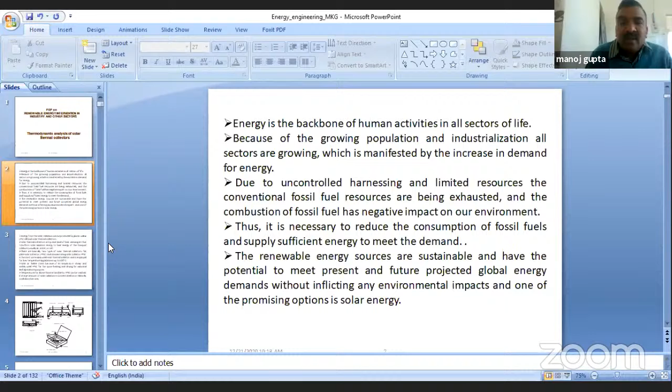And solar energy is one of such kind of renewable energy source. Energy is generated inside the sun due to continuous conversion of hydrogen into helium, that is nuclear fusion reaction. The temperature inside the sun is very large, but at the surface of the sun it is estimated to be about 5600 Kelvin. So sun radiates heat energy as per Stefan-Boltzmann law, and the radiation also reaches on the ground.

It is said if we can trap only 5% of this energy received from the sun on the ground, then we can meet the entire energy consumption demand of the world. So that's why solar energy is a very large source of energy. Definitely it is renewable, and it is very, very large.

Now, energy from the sun we can utilize by using solar cell or by using solar thermal collectors. Indirectly, we are using solar energy since long. That's why we treat the sun as God, because sun provides energy in various forms. For example, biomass, photosynthesis reaction is in the presence of sunlight. So energy from biomass is an indirect form of solar energy.

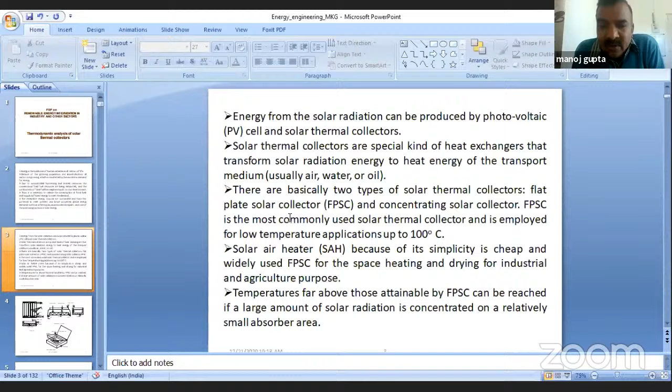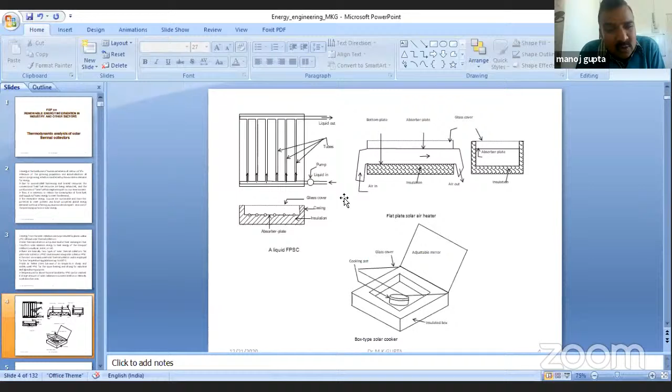I am talking about conventional because nowadays the solar water heater for domestic application is evacuated tube type. This is conventional, in which there is an absorber plate, and at the back of the absorber plate a number of tubes are welded, soldered, or clamped to the plate, and these tubes are connected to header tubes. So water flows through the tube, being heated, and is collected in the storage tank.

The next diagram is for solar air heater. Whenever there is a flow of air, from fluid mechanics, the flow of air is always through a duct in order to keep the pressure drop within limit.

As we know from the Darcy-Weisbach equation, 4fLV squared upon 2gD. In case of gas flow, for a given mass flow rate, the volumetric flow rate is high. So if a compressible fluid or gas is made to pass through a smaller cross-sectional area, the pressure drop will be more.

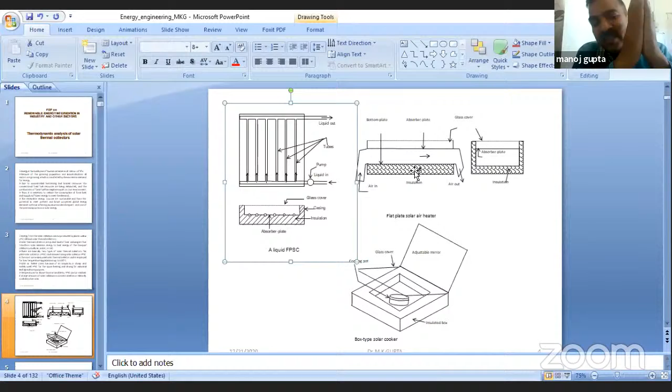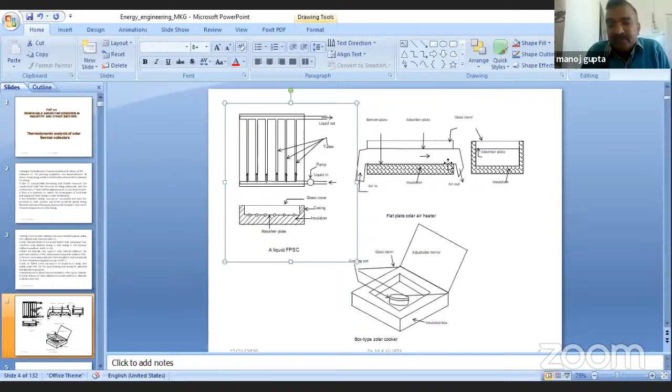So in order to keep the pressure drop within limit, the flow of air is always through a duct. Instead of a pipeline, we use a duct, and in case of solar air heater, the duct is formed by the absorber plate and a bottom plate, and the space between the absorber plate and bottom plate forms a duct. So air flows through this duct in the case of an air heater.

And now if we are using a concentrating collector, we can also use selective coating, and second, we can create a vacuum in the annular space between the glass tube and the absorber tube.

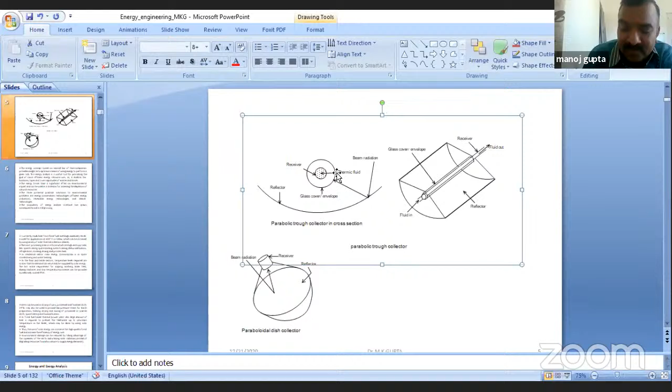In case of this flat plate collector, suppose this solar cooker, we cannot create vacuum between the flat glass and inside of the box or cooker, because glass is breakable. We cannot create vacuum in this.

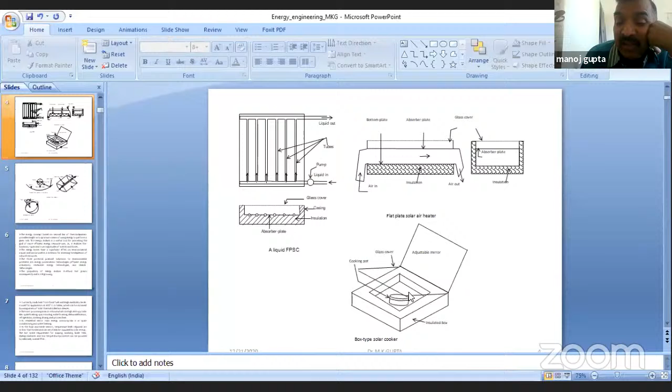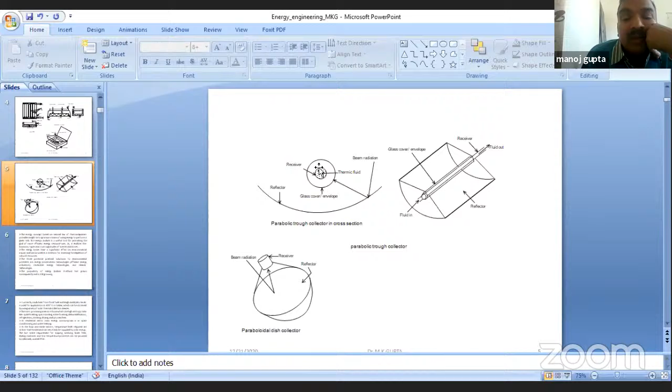But in case of concentrating collector, the vacuum can be created in the annular space between the absorber tube and surrounding glass tube. And definitely if we create the vacuum, then convection heat transfer is further reduced.

So by creating vacuum, we reduce the convective heat transfer from this absorber towards the glass tube. Because here the area of the absorber surface or receiver tube is small, we can go for selective coating.

In heat transfer, you might have studied Kirchhoff's law, which says absorptivity is equal to emissivity. Now this absorptivity may be on total basis or based on particular wavelength. So Kirchhoff's law says monochromatic emissivity is equal to monochromatic absorptivity, meaning emissivity for a wavelength equals absorptivity for that wavelength. Similarly, total emissivity is also equal to total absorptivity.

Now every body emits radiation of all wavelengths. As I told, solar radiations are of short wavelength in nature. So there are some coatings which have high absorptivity or emissivity for incoming solar radiation and low absorptivity or emissivity for outgoing radiation.

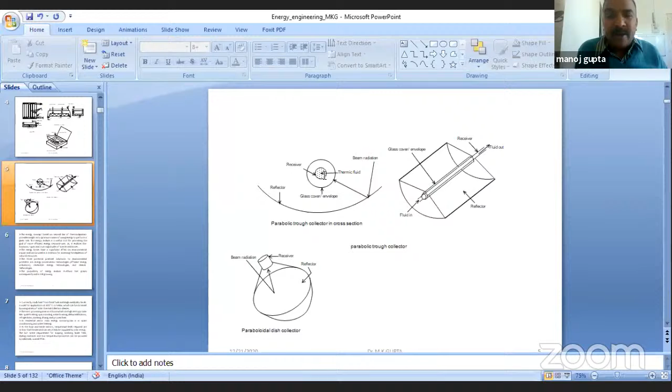Water is stored at high altitude. That potential energy of water, as we know from hydraulics, can be converted fully, if we ignore friction, into work or any other form of energy, because potential energy is high grade energy. But heat or thermal energy or internal energy are low grade energy, and complete conversion of low grade energy, especially heat energy, is not feasible.

Into high grade energy. For example, if we have heat Q from a source at temperature T, heat Q from a source at temperature T. Source means if we extract the heat Q from that source which is at temperature T, the temperature of source will not change. Now we can utilize this heat Q in a reversible heat engine cycle or Carnot cycle to develop work.

And work developed will be heat supplied into efficiency of heat engine. And efficiency of heat engine is 1 minus T rejection upon T heat addition. Means in this manner we can calculate the useful work that can be obtained from heat energy.

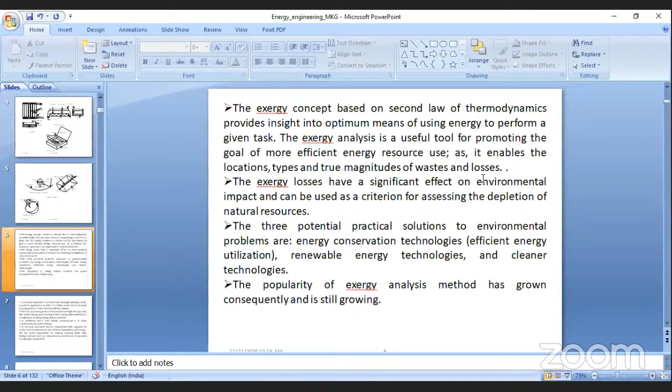So the exergy, or the second law of thermodynamics - actually first law deals about energy, while second law talks about the quality of energy. Or logically we can say heat energy at 30 degrees centigrade and heat energy at 200 degrees centigrade. Definitely heat energy available at 200 degrees centigrade is better than that available at 30 degrees centigrade, because heat energy available at near ambient temperature is of no use for us, but the exergetic value of heat energy available at higher temperature is more.

So from energy conservation point of view, we should include exergy analysis, or we should talk in terms of exergy besides the energy, because definitely we will have to use the energy balance first. So the exergy concept, based on second law of thermodynamics, provides insight into optimum means of using energy to perform a given task.

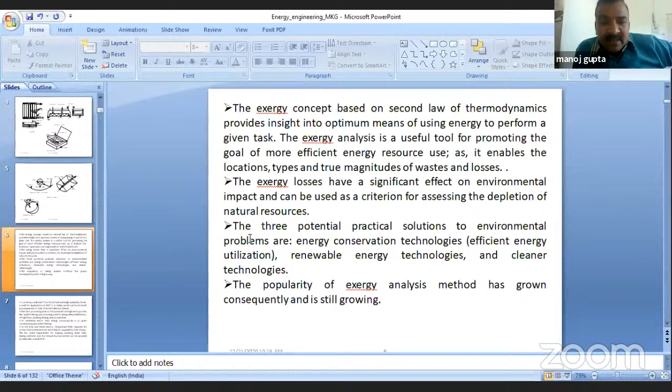Now come to why this FDP topic is relevant to exergy analysis. Currently, much heat from fossil fuels with high availability level is used for applications at 300 degrees centigrade or below.

For example, to heat water for bathing purpose, we normally use an electric geyser, meaning we are using high grade energy, electric energy, just to heat the water at 80 degrees centigrade. Currently much heat from high grade energy sources is used for applications at 300 degrees centigrade or below, which can be obtained by using a variety of solar thermal collection devices. For example, water heating - instead of electric geyser, we can use a solar water heater.

Actually, there is a degradation of energy by using electric geyser. I will come to those points later.

Now the most promising areas are those which are high entropy tasks, meaning where we can use renewable or solar energy instead of high grade energy for low temperature applications. The low temperature applications may be space heating, space cooling, water heating. Space cooling means using heat energy in vapor absorption refrigeration systems, either ammonia-water system or lithium bromide-water system, and water heating. All these are applications where heat energy is required at low temperature. I have not mentioned power generation. These low temperature heat requirements can be fulfilled by solar thermal energy, and if we promote the use of solar thermal energy in such applications, we can conserve our exergy rich fuel.

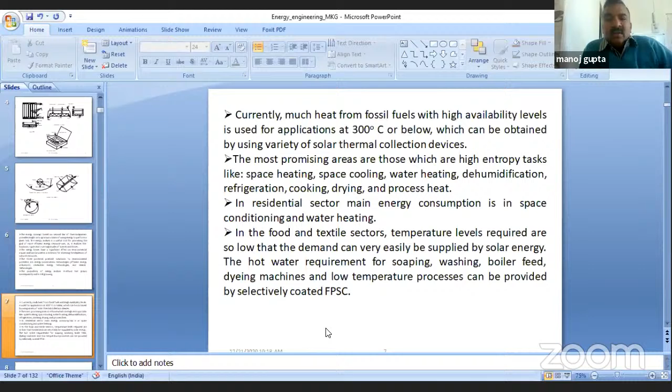Now, we were discussing that below 300 degrees centigrade, there are various applications where temperature is required, and that can be obtained using a variety of solar thermal collectors. Solar air heaters can be used for drying of yarn in textile and other industries. Parabolic trough collectors may be used to produce low pressure steam, which can be used for other purposes, even in thermal power plants.

Now, if you go to this point, I think Dr. Siva Reddy might have discussed it. In case of a fossil fuel based thermal power plant, the steam leaving the turbine is condensed in the condenser, and the temperature of the condensate leaving the condenser may be about 60 degrees centigrade, while the steam is generated in the boiler at about 540 degrees centigrade or more. I am talking about the steam turbine based power plant.

Now this water leaving the condenser is supplied to the boiler through a number of feed water heaters, again to reduce the exergy loss in the boiler. So the water is regeneratively heated in various feed water heaters from condenser temperature to the entry temperature of the boiler. But still in the boiler, the water supplied is first heated up to saturation temperature, and then steam generation takes place.

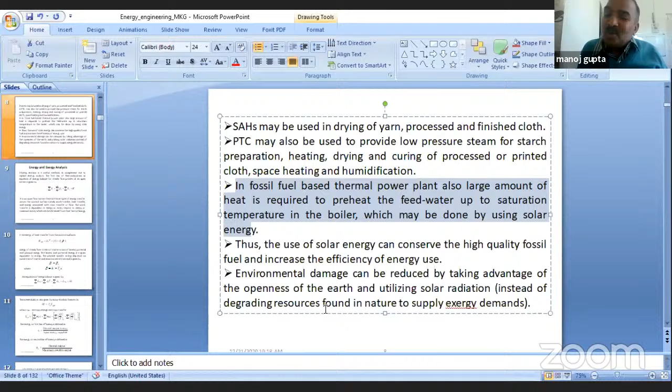Or what we can do, we can utilize the exergy rich fuel. If the flue gas temperature is, let us say, 1000 degrees centigrade, we will not use this flue gas available at 1000 degrees to heat water at 250 degrees centigrade. Instead, we will use this heat energy to generate steam at 300 degrees centigrade or more, provided the heating of feed water is carried out using solar thermal energy besides the feed water heater. So there are various options to use solar energy, low temperature as well as, because by using concentrating collectors, we can generate temperatures more than 1000 degrees centigrade. So solar energy can be used even to create a furnace.

Now, again, this is first law. First law is based on the law of conservation of energy: energy in is equal to energy out, energy entering is equal to energy leaving. While writing the first law of thermodynamics, we write energy entering associated with mass transfer or flow stream, that is kinetic, potential, and internal energy, and energy associated with heat transfer, as the entering energy group. While in the leaving energy group, we again write energy associated with mass transfer leaving along with the matter, plus energy transferred due to work developed by the system. This is the first law of thermodynamics for an open system.

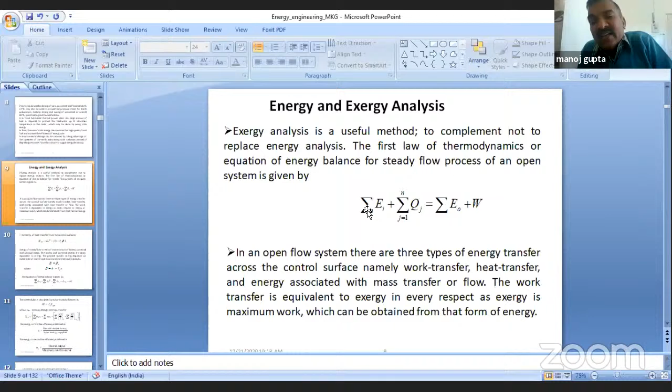Now, energy associated with a steady stream of matter comprises kinetic energy, potential energy, and internal energy. I mention this relation because exergy is the maximum work that can be produced from a given form of energy. So, if we have heat Q from a source at temperature T, then by using a reversible heat engine or Carnot cycle, the maximum work that can be developed is Q multiplied by this term, which is the exergy associated with heat transfer. That is, if heat transfer Q takes place from a source at temperature T, its exergy value is Q multiplied by this term, similar to the efficiency of a Carnot or reversible heat engine cycle.

So we can calculate the exergy of heat transfer. Definitely, if the temperature of the heat source is high, its exergetic value will be high. So heat energy available at 100 degrees centigrade versus heat available at 1000 degrees centigrade: the exergy value of heat energy at 1000 degrees centigrade will be more, or we can develop more work by using heat available at higher temperature.

Now, energy associated with a stream, kinetic and potential, are high grade energy, meaning their exergy value equals themselves. But physical specific exergy depends on the initial state of matter, and we calculate it as enthalpy minus ambient temperature into entropy, H minus TS.

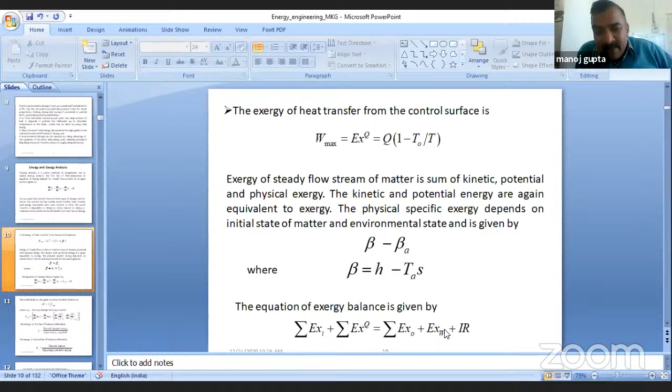Now, work means high grade energy, so this exergy associated with work transfer is equal to work itself plus IR, where IR is irreversibility or exergy loss. Exergy loss is calculated by the Stodola theorem, T times entropy generation, and this entropy generation is calculated using this relation. Now I will come to first law efficiency and second law efficiency.

Now, the efficiency term we define as output upon input. If we use energy in both numerator and denominator, then it is first law efficiency, which we commonly use. But if we use exergetic value instead of energy, then it becomes second law efficiency.

All of us study this in refrigeration and air conditioning. The performance of any refrigerator is output upon input. Output is the desired effect, maybe heating or cooling. Input is work. For most refrigerating systems or cycles, this ratio comes out to be greater than unity, that is, refrigerating effect upon work input. Why is it more than one? Because we are using high grade energy to produce the refrigerating effect.

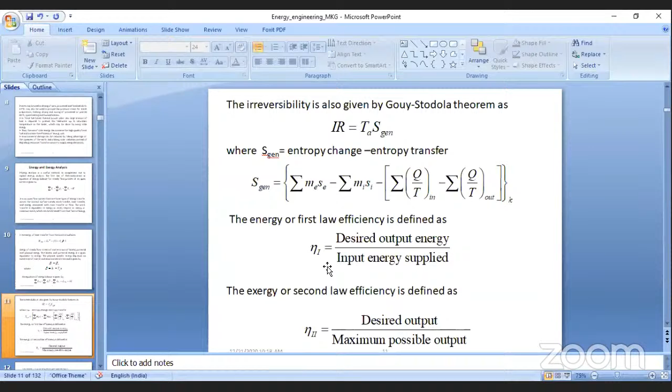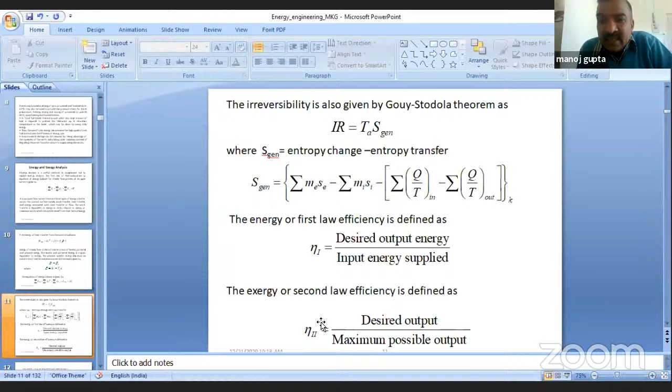That's why in refrigeration we never use the efficiency term. We use coefficient of performance, because this ratio comes out to be more than one, meaning first law efficiency may come out to be more than one for some applications. That's why we use the COP term in refrigerators. So it's more appropriate to use second law efficiency. How? We will discuss it if it is feasible.

Now this example, all of you, especially those who have studied thermodynamics, might have solved this problem.

Let us illustrate the second law efficiency of a gas heating system designed to maintain a building at TU. Suppose I want to maintain a confined space at TU by using flue gas. So what can I do? Burn the fuel and supply the flue gas through the duct or pipe towards the space. So heat Q is added to the building at temperature TU by using heat QF from the flue gas.

If it is not clear, then take the example of an electric geyser. In an electric geyser, by using 1 kilowatt of electricity, or 1 unit, 1 kilowatt hour of consumption, it is perfectly insulated, so all the electric heating is transferred to the water, that electricity is completely utilized to heat the water. Even if we assume some losses, the efficiency is still close to unity.

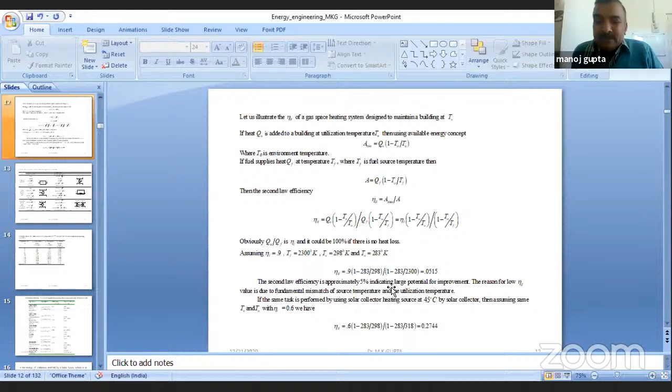Especially if we are using an electric motor, then definitely you will have to use electricity. But the geyser, as per thermodynamics second law analysis, is not an efficient device because we are converting high grade energy into low grade energy. So for such low temperature applications, from the second law, the conclusion is we must use either waste heat energy sources, solar energy, or other energy sources available at low temperature.

This is to preserve the exergy-rich fuel. Again, all of you might have solved one more example—let me take this from the example of refrigeration.

Suppose I want to heat a room, and I want to add 1 kilowatt hour or 3600 kilojoule of heat to the room. This heat I can add by using an electric heater by the consumption of 1 unit, 1 kilowatt hour. So to add 3600 kilojoule of heat, I have consumed 1 unit of electricity.

Now think, if I use this 1 unit of electricity in a heat pump, reverse of a refrigerator, and as we know COP of a heat pump is always more than 1—suppose the heat pump is based on a vapor compression cycle, and we take COP equal to 3—then what I can say is, by using that 1 kilowatt of electricity in a heat pump, I can add 3 times the heat to the room. Or, just to add that 3600 kilojoule of heat, I will require only 1/3 of the power input in comparison to direct heating.

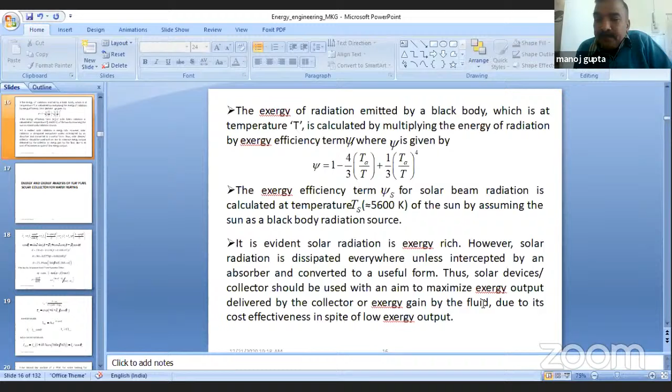Now, let me come to my topic: Exergy analysis of flat plate solar collector for water heating. Conventional.

These are some relations which I will discuss. This relation is solar radiation falling on a glass cover, on the top of the glass cover of a flat plate solar collector. In this relation, tau, the subscript B stands for beam radiation, D for diffuse radiation. Tau is the transmissivity of the glass.

Beta is the slope of the collector. As you might have seen, the solar flat plate collector is normally inclined at a certain angle and facing due south, placed south facing and inclined at some angle from the ground. That angle is dependent on the latitude of the location, plus minus 10 degrees. Depending on use, if in winter, the inclination may be more, and if used more during summer, the inclination will be less than latitude. So beta is the slope of the collector.

IB and ID are for beam and diffuse radiation. And this theta1 is the angle made by solar radiation with normal to the collecting surface.

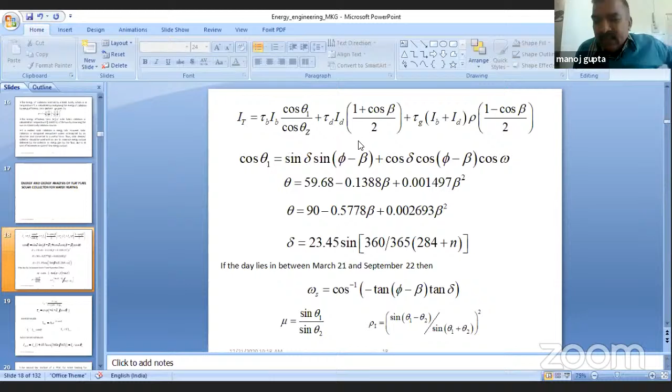So this angle theta is the angle made by solar radiation with normal to the collecting surface, which you can observe during the morning hours. Solar radiation appears to come from the east; during noon we can observe that it is coming almost normal to the ground, then in the afternoon it changes again. So they depend on the time. I am skipping these relations because mainly I will focus on the exergy analysis.

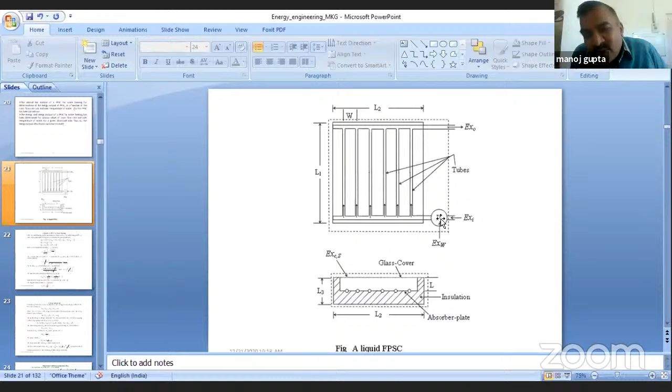Actually, this water heater may be natural circulation type or forced circulation type. I have taken forced circulation type. So this pump circulates the water supply through to the bottom header tube. Then water flows through the various tubes, and finally, after heating, it exits.

Now here, L1 is the length of the collector, L2 is the width of the collector, W is the spacing between two tubes, that is the pitch. If we say this is the top view, if we are keeping this flat plate on the ground without any inclination, then let's say this is the top view and this is the front view. Now from the front view, you can observe the tubes, this hatched portion is insulation at the bottom and sides, and the glass cover. The purpose of the glass cover, as we all know, is to reduce the heat loss.

Now, again, I am repeating the principle of collection. Solar radiation falling on the glass cover is transmitted from the glass towards the absorber. The absorber absorbs it. So the solar flux absorbed depends on the transmissivity and absorptivity of the cover system, and the absorptivity of the absorber plate. Again, I am skipping how the transmissivity-absorptivity product is calculated.

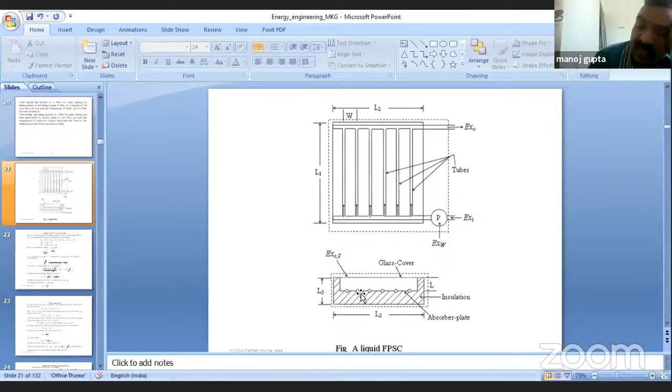In order to reduce these heat losses from the bottom, we put insulation at the bottom. At the sides, again we put insulation. And from the top, since we have to allow the solar radiation in, we put a transparent glass cover.

So though we use various means to reduce the heat loss, there will be heat loss whenever there is temperature difference. So when solar radiation is absorbed by the absorber plate, temperature rises and heat loss also increases. Basically, solar radiation absorbed and transferred, temperature becomes more, so heat loss also takes place. All these parameters are dependent.

For a given solar flux absorbed by the absorber plate, we can say more the solar flux, temperature of absorber plate will also be more. But if we circulate the fluid at higher flow rate, what will happen? Temperature of plate will become less.

Means this temperature of the absorber plate, at a first instance, we can say will depend on the amount of solar radiation absorbed by the absorber plate. More absorption, more temperature. But this temperature will also depend on the mass flow rate of the fluid to be circulated. If the flow rate is high, means more heat extraction, means temperature will be less compared to when flow rate is less.

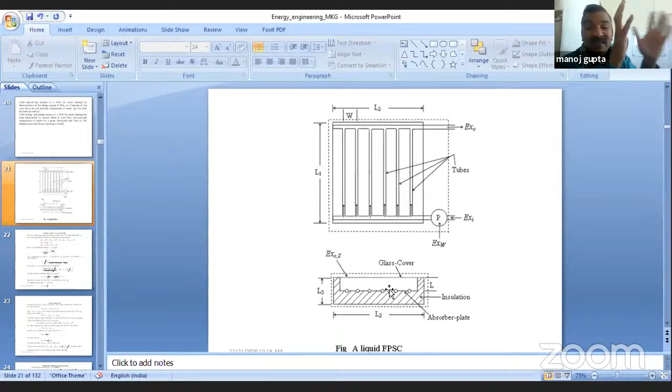And again, logically, we can say that in order to maximize the useful heat gain or to increase the heat gain, loss should be less. So what should be there? To reduce the heat loss, temperature of the absorber plate should be less. If it is near ambient, there will not be any loss. So logically, thinking by using mCp del T, and second from heat loss consideration, that heat loss depends on TPM.

What I can say, energy gain by this solar thermal collector, any solar thermal collector, will be more if the transport medium or fluid to be heated is circulated at infinite flow rate and at near ambient temperature. At near ambient temperature means circulate the water or other fluid at high flow rate and at low temperature. So in this manner, we will extract more heat from the absorber plate. Plate temperature will be nearer to the ambient, so heat loss will also be very, very less. Means heat gain will be more.

But what will be the use of this heat energy collected? Of course, we are collecting a large amount of heat at a temperature which is nearer to the ambient temperature, because mass flow rate is high, so del T will be very negligible. So again, exit temperature of the fluid is nearer to the ambient. So there will not be any potential use of such heat energy collected at a temperature nearer to the ambient. So we must try to collect, or we should focus on the exergetic value, not only in terms of energy. Just I am giving an idea why exergy analysis is relevant to this.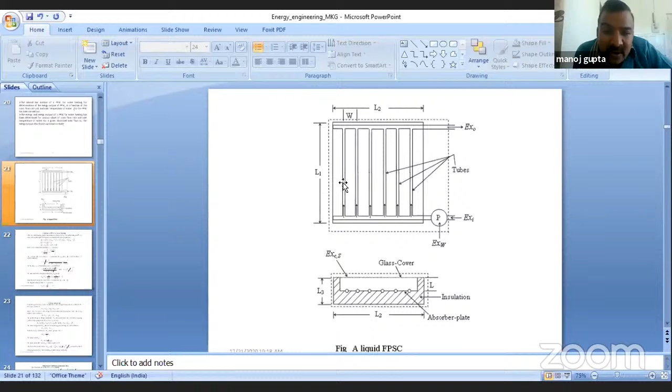So before coming to the next page, let me explain how the first law or the energy relations are derived for this flat plate collector. Basically, in this conventional flat plate collector, as I have mentioned, this TPM is related to S, mass flow rate, Ti. But all these are combined and some equations are developed. How? For the derivation purpose, just I am giving an overview. We consider the plate portion in between any two consecutive tubes.

Consider the plate portion in between any two consecutive tubes. First, we calculate the solar radiation coming onto the plate portion over the tubes. For a tube, there is a plate portion over it, so first we calculate how much heat energy is coming to this plate portion, and this heat energy is first due to radiation directly falling on the plate portion over the tube.

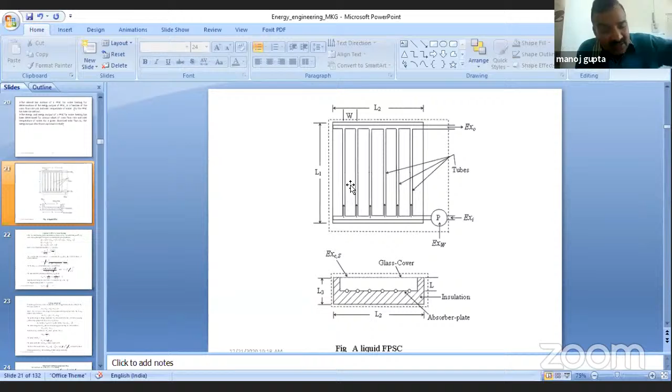First, radiation falling on the plate portion over the tube. Second, in between any two consecutive tubes there is a plate portion, and solar radiation is absorbed in this plate portion. Temperature of this plate portion rises, and this heat flows towards the plate portion over the tubes. So heat energy over the tube is first directly falling, and second conducted from the plate portion in between two tubes. This derivation is similar to the analysis of a fin, a rectangular pin fin, from heat transfer.

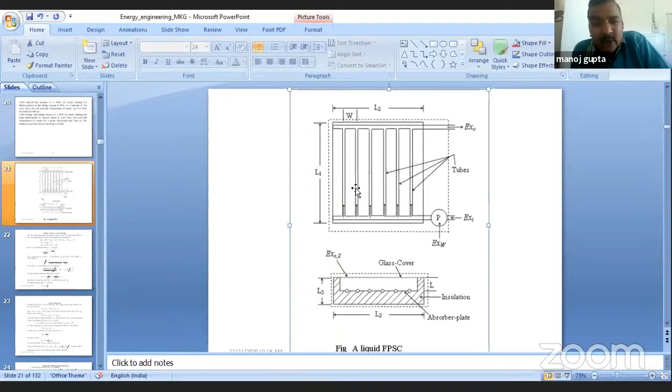Then finally we calculate how much heat will be conducted inside the tube, conducted plus convected through the fluid flowing through the tubes. In that manner we can derive the relation by using first law analysis. So let me write those relations. Just remember the previous figure.

The actual heat gain QU by water flowing through the collector may be calculated by the following equation. First, this middle equation: M Cp, T outlet minus T inlet. There is no need for derivation here. M is the mass flow rate of water, Cp is specific heat of water, and To minus Ti are the outlet and inlet temperatures of water.

This relation also needs no derivation from heat transfer analysis; I am just writing the balance of how much is absorbed minus how much is lost. So the useful heat gain is S into AC, where S is the absorbed solar flux per unit area, AC is the collector area, minus UL, where UL is the loss coefficient, the heat loss coefficient based on this area — the absorber plate area.

So S minus UL, and because heat is lost from the plate at temperature TPM, the temperature difference is TPM minus TA. So one way to write the useful heat gain is absorbed minus loss. Another way is heat gain by the fluid, MCp delta T. And this third one is obtained by the heat transfer analysis I was discussing, by considering the plate portion in between two tubes — this relation is known as the Hottel-Whillier equation.

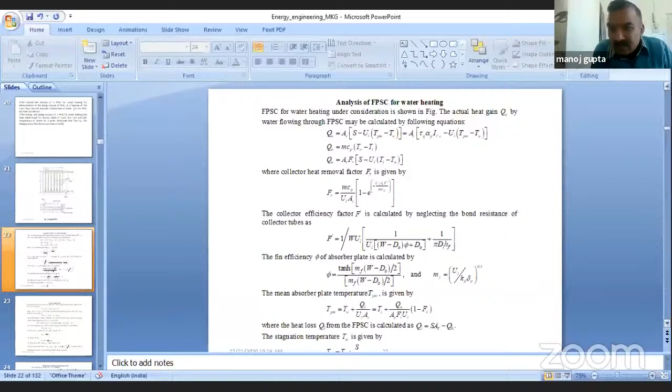And then there is one more definition, that is stagnation temperature. When we study compressible flow, we also define stagnation temperature, but that stagnation temperature is when velocity is reduced to zero, or the conversion of kinetic energy into temperature as well as pressure energy. Here, in case of solar thermal collector, stagnation temperature.

Again, you can think logically. If there is no flow through the water heater, then what will happen? Temperature of the absorber plate will go on increasing, and at the same time heat losses will also go on increasing. In the equilibrium state, when absorbed solar flux equals heat loss, the temperature attained is the maximum possible, and the temperature attained by the solar thermal collector when there is no flow is termed as stagnation temperature.

And this stagnation temperature relation, from where does it come? This formula QU is equal to this. Because what we are saying is there is no flow, or useful heat gain is 0. So from this first equation, you can get this relation.

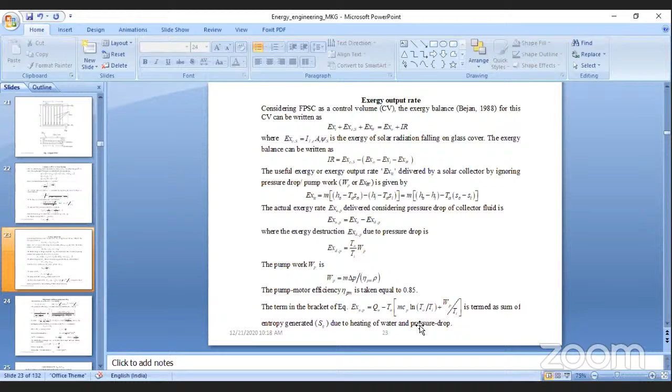Integral dq by T, that is Cp log, so I can write Cp log TO upon Ti. While this WP by Ti term is due to pressure drop, I'm not including that here. So useful exergy is Qu minus Ta times mCp log TO upon Ti.

Now, these are the relations which I think I will skip, for how the various heat losses are calculated while doing the analysis of the collector: top loss, bottom loss, side loss. Then we also require the correlation for heat transfer through the tubes, heat transfer coefficient value H, depending on the flow—laminar or turbulent. Accordingly, we calculate the H and pressure drop or coefficient of friction value.

Now, let me come to this conclusion.

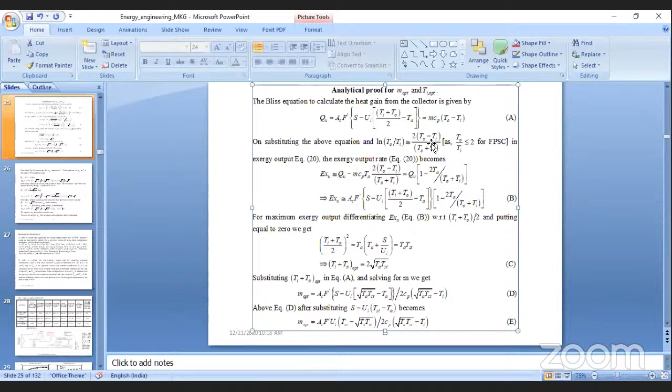So by using that series, what I have used is this log(TO upon Ti). Because in the exergy output relation, HO minus HI minus TA(SO minus SI), where SO minus SI is the entropy change, involves log(TO upon Ti). So I will replace log(TO upon Ti) by twice of (TO minus Ti) upon (TO plus Ti), because TO upon Ti is less than or equal to 2.

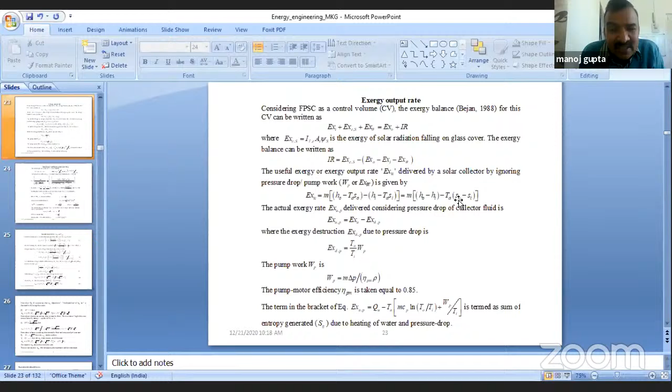And I will put this in the exergy relation mentioned earlier: QU, that is MCP(TO minus Ti), minus TA times M(SO minus SI), which means Cp log(TO upon Ti). So putting this in, I get the exergy output relation.

Using the first relation for QU and then MCP TA log(TO upon Ti), exergy output is heat gain minus MCP TA log(TO upon Ti), and log(TO upon Ti) is replaced by the approximation. So on simplification, we get this exergy output relation.

Actually, during my PhD, I first performed some simulation and obtained some results. Just to give a conclusion, I used this simplified method, deriving this relation to come to some concrete conclusion.

Now from this exergy output relation, what we can observe: for given S, the solar radiation intensity absorbed, and for given collector area AC, these are constant. F' is also nearly constant, and UL is also constant. Of course these are variable in reality—the heat loss coefficient depends on temperature and will fluctuate—but I am assuming, for derivation purposes, that UL is constant.

So keeping other parameters constant, the only variable is (Ti plus To)/2. So differentiating with respect to (Ti plus To), then setting it equal to 0, the maxima-minima procedure.

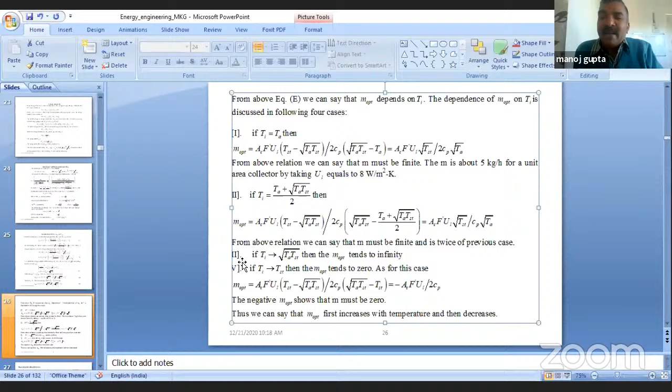And if the inlet temperature is equal to stagnation temperature, then there will not be any useful heat gain, or exergy output will be zero. There should not be any flow.

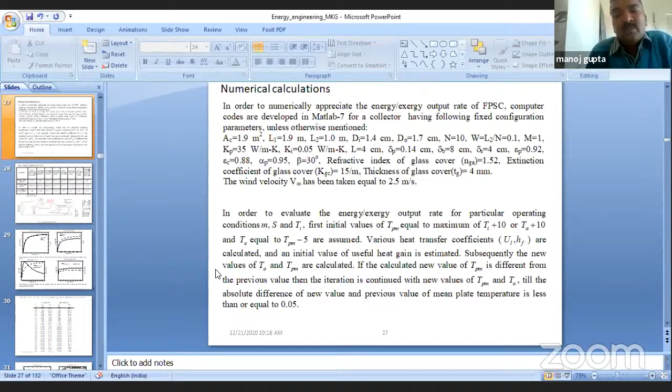Now, other than that derivation, if we simulate that collector for various values of absorbed solar flux, let me explain the procedure first, how the calculation may be done. Suppose I am writing these relations.

Now for a given solar absorbed flux S, actually it will vary with the time of the day. So for a particular time, or for a particular value of solar absorbed flux S, and for given ambient temperature, because I can assume or take the data from any place, for given ambient temperature, first what should we do?

First assume plate temperature, according to either the ambient temperature or inlet temperature of the fluid. Plate temperature should be chosen more than these two values. And by

selecting the plate temperature, now we will proceed to do the various calculations. How? Just say, for example, I have written here. This doesn't require any iteration. I can calculate it first for the given collector, bottom and side loss.

But top loss will depend on the TPM. Top loss will depend on the TPM. So by assuming TPM, I will calculate the top loss coefficient.

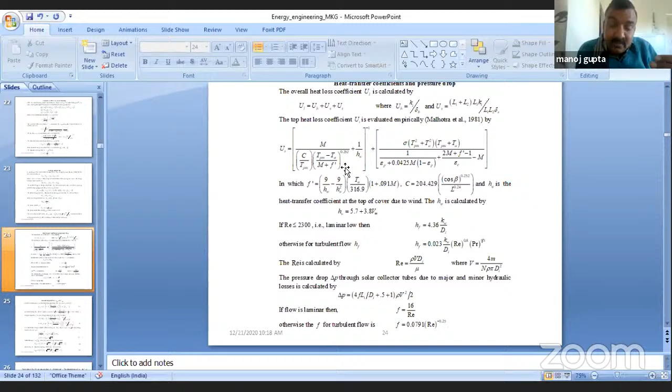Then, as I have assumed TPM, I have calculated top loss coefficient, means now we can calculate the overall loss coefficient. And by using this relation, because we know UL, we have calculated the top loss coefficient.

This F dash, again I will calculate, then FR, then useful heat gain. Then using this relation for useful heat gain, I will calculate again TPM. Start from the assumption of TPM, and then finally again we will calculate the TPM.

And for the exact calculation, this final value of TPM must be close to the previous value. So in programming, looping or iteration is carried out till the difference between the calculated value of TPM and its previous value becomes very, very small. So this is just the idea about the programming.

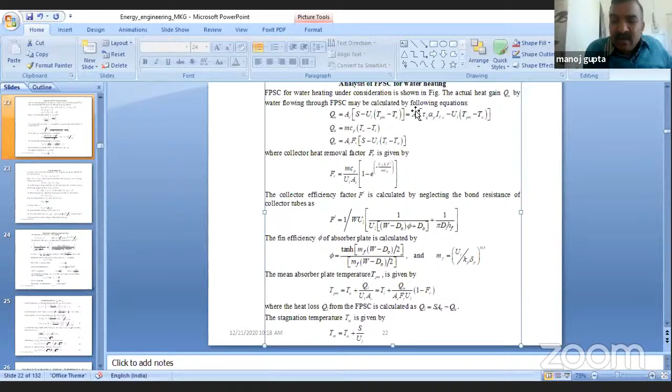So exergy output, if I plot the graph of exergy output versus mass flow rate. If you recall the derivation I mentioned, if inlet temperature is nearer to the ambient, the mass flow rate must be finite for maximum exergy output.

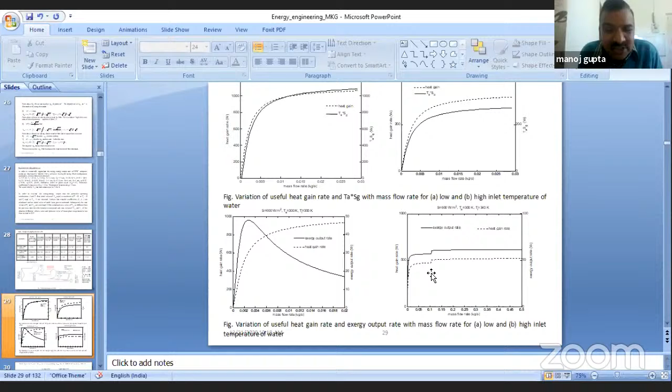I think we are running short of time, so I will not cover that. Just I will give another idea.

By using exergy analysis for a given solar absorbed flux, we can calculate optimum inlet temperature, optimum mass flow rate, or for a given inlet temperature we can calculate optimum mass flow rate, or for a given mass flow rate we can calculate optimum inlet temperature. Similarly, for a given solar flux, we can calculate the global optimum inlet temperature and global optimum mass flow rate. Then for the entire day, we can determine what the inlet temperature and mass flow rate should be. So by using exergy analysis we can decide the range.

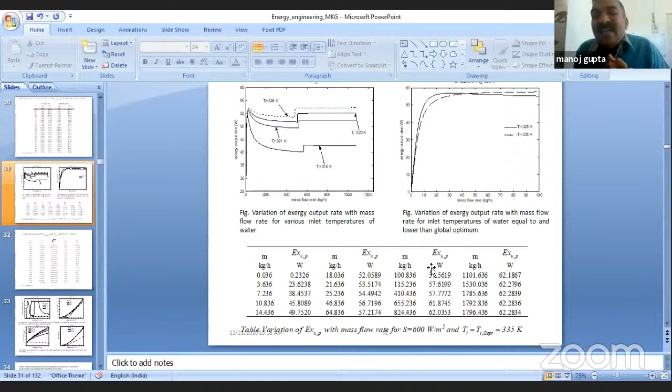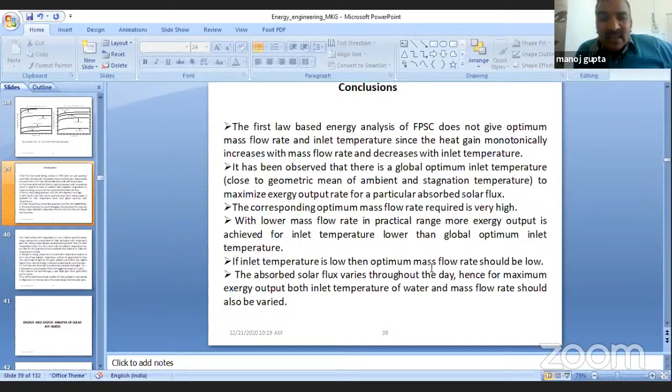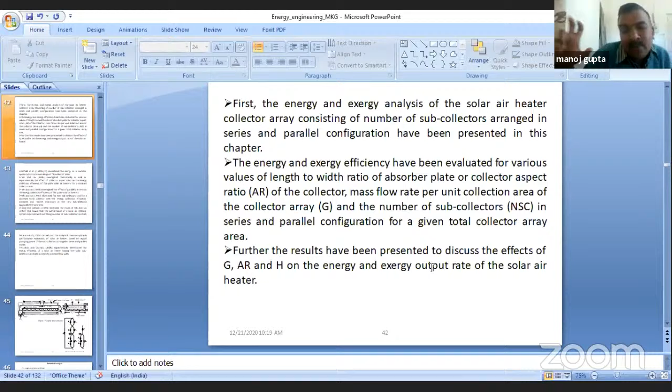Now in case of solar water heater and air heater, since it is not feasible for me to discuss all of those, I will just give you an idea. In case of a solar air heater, the duct is formed, as I discussed in the construction, and the flow of air always takes place through the duct. The duct is formed by the absorber plate placed at the top and a bottom plate. Flow takes place through the duct passage formed between the absorber plate and bottom plate.

And if along the flow direction the length is L1, which is the length of the solar collector, and the width is L2, and the duct depth is L3 or capital H, whatever you use, then the collector aspect ratio is L1 upon L2.

Just imagine I have to form a rectangle, so the length may be different from its width. For a solar air heater, suppose I want a solar air heater of 100 meter square surface area. One option is to choose a collector having length 10 meter, width 10 meter. Another option is to choose length 20 meter, width 5 meter. What am I doing? L1 into L2 equals the area.

So if I go on reducing the width, I have to increase the length. This means the aspect ratio for the collector, defined as length to width, if it increases, we are manufacturing a longer collector, or a collector having high aspect ratio, meaning the width becomes less. Width becoming less means the cross-sectional area of flow through the duct, which is width into depth, reduces. So by increasing the aspect ratio, we reduce the width, meaning we reduce the cross-sectional area.

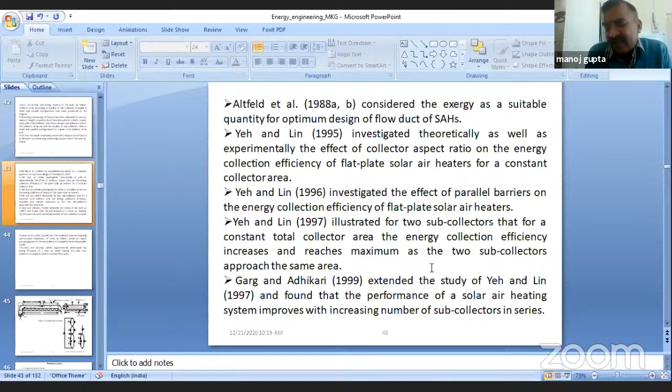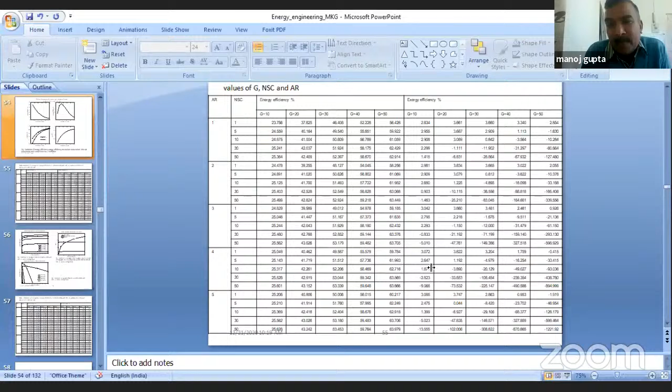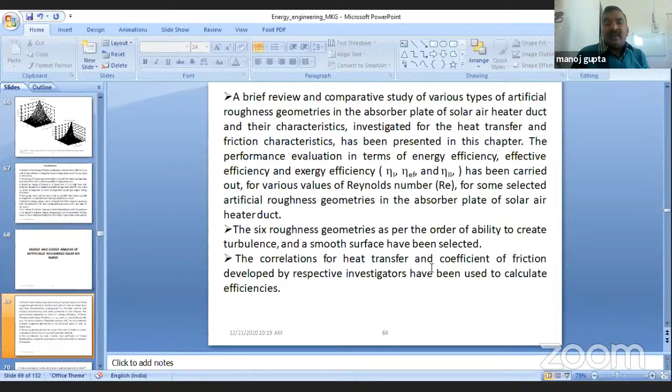One more example I will give. In case of solar air heater, because air is not having suitable thermophysical property, in order to improve the performance, we can use fin or extended surface at the bottom of the absorber plate, or we can use artificially roughened surfaces on the bottom of the absorber plate.

Now just to understand, assume a plate, absorber plate, top is painted black, while at the back side use an expanded metal mesh, net, mosquito net, metallic mosquito net, adhere that to the plate. Then that rough element is the roughness element on the absorber plate.

Similar to that, we can attach wires. We can create artificial roughness by some other means. So by using artificial roughness on the absorber plate, for example this expanded metal mesh, it will act as a turbulence creator. And as the flow of air is mostly turbulent, in turbulent flow there is a laminar sublayer in the boundary layer. So these artificial roughness geometries break that layer, create turbulence, and enhance the heat transfer coefficient.

And again, enhancement of heat transfer coefficient always comes at the expense of pressure drop. So by using this artificial roughness geometry, definitely heat gain will increase. And several researchers have developed correlations for heat transfer coefficient and friction factor for these roughness geometries, just by varying parameters.

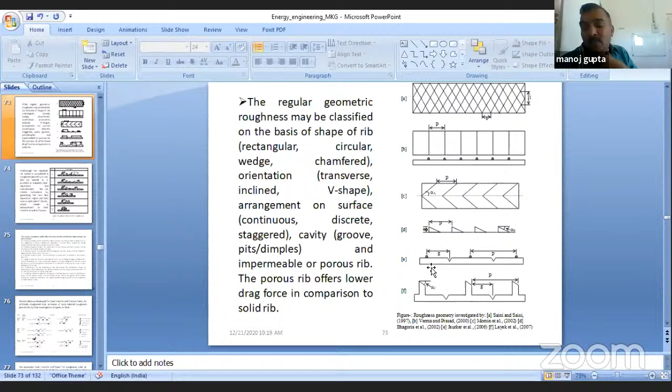And they have given the conclusion that we should use the artificial roughness geometries. And again, because there will be more pressure drop, you can use exergy analysis to determine the optimum size of the roughness geometry. That is even only for lower flow rate, because for higher flow rate, pressure drop will be very much, and from the exergetic point of view, these roughness geometries will not be suitable.